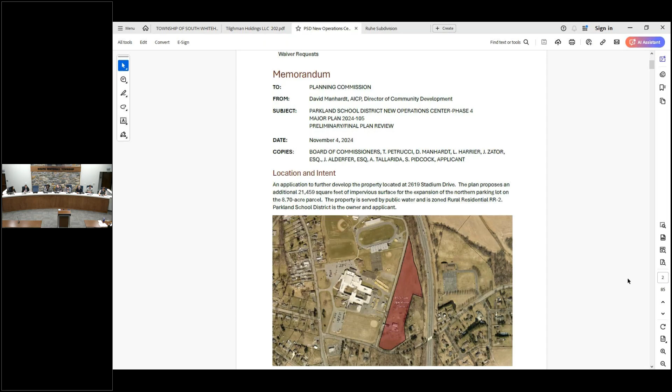All right, we're on agenda item number 4, subdivision review. We have 3 projects for review tonight. The first one is Parkland School District, New Operations Center, Phase 4. Before we get into that project, the company I work for does some work for the school district, so I'll be recusing myself from any votes. All right, we can start with the township staff presentation.

This is an application to further develop the property located at 2619 Stadium Drive. The plan proposes an additional 21,459 square feet of impervious surface for the expansion of the northern parking lot on the 8.7 acre parcel. The property is served by public water and is zoned rural residential 2. Parkland School District is the owner and applicant.

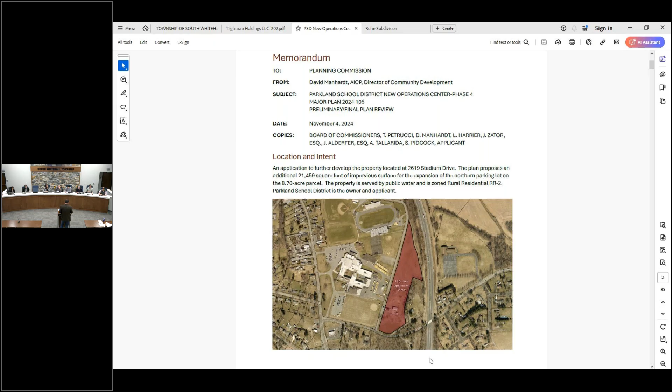We've seen various versions of this. This is the 4th phase, so they're looking to do some parking lot improvements. We are recommending approval based on conditions.

The conditions: prior to plan recording, the applicant should execute subdivision improvement, security maintenance, and indemnification agreements. Prior to plan recording, the applicant shall address to the satisfaction of the township engineer, the township water and sewer engineer, the geotechnical consultant, the public works department, public safety commission, landscapes and shade tree, parks and recreation board, community development department, and township zoning officer.

Then we're on conditions 11 and 12, which carried over from the previous phases. These conditions have the school district monitor the intersection at Limekiln and 309. There was some concern about the timing of these improvements in relation to the betterment project, so we're going to keep an eye on it as a team, and if anything comes up, we'll have it addressed.

The applicant addresses all issues and obtains all approvals deemed necessary by the Board of Commissioners, shall execute a declaration of covenants and easement for maintenance of stormwater management facilities, and shall reconcile all open invoices for engineering and legal services prior to plan recording.

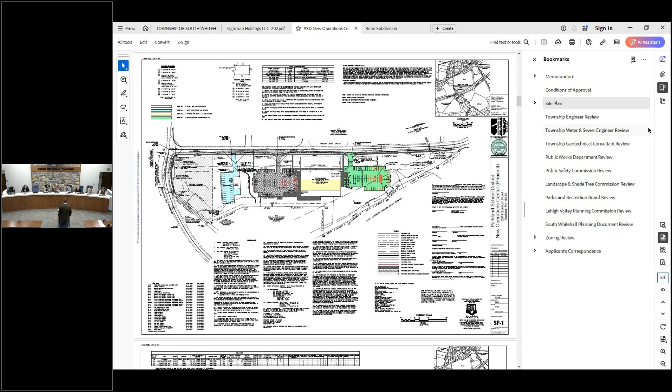All right, I'll read through them. Number 2 is section 312-12B20, requiring location, character, and elevation of any building within 100 feet of the tract. Given the minor nature of the development, a waiver of this requirement is requested to use aerial photographic information instead. Those in favor of the waiver? Make a motion. I'll second the motion. Those in favor? Aye. I'll abstain. Any opposed? None opposed. So moved.

Waiver request number 3, section 312, 12B, 15, and 21, requiring location of contours and sidewalks, trails, driveways, streets, easements, etc. within 400 feet of the tract. Given the minor nature of the development, a waiver of this requirement is requested. Does anyone want to make a motion? So moved. Second. Those in favor? Aye. I'll abstain. Those opposed? None opposed. So moved.

Waiver request number 4, section 312.13F3 and 312.43, requiring plans to be recorded prior to the issuance of a building permit. Given the minor nature of the development with site improvements previously approved, a waiver of this requirement is requested to allow the issuance of building permits. Do we have a motion? I'll make a motion to approve. Second. Those in favor? Aye. I'll abstain. Any opposed? None opposed. So moved.

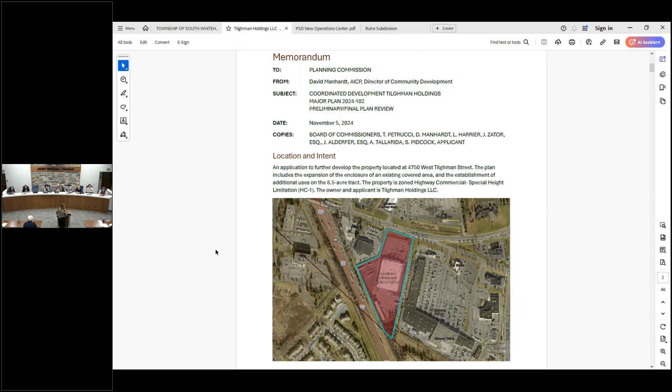Just to give a little bit of background, the project was subject of a waiver from land development, so the Planning Commission did not see that, and that was for GoPuff to go into the space that is now the Advanced Auto. So this application is really to formalize what's out on the site, and then include the area to the rear of where the Advanced Auto is going.

That's really the intent of this application, because they have additional plans for that. So this is really the starting point. At this point, we're not making a recommendation to approve. There's some cleanup that we have for the plans, but they are asking for clarification on some waivers, and particularly the discussion about the frontage improvements. With that, I can hand it over to Erin.

As mentioned in our November 7th memo to the township, a preliminary final plan review was performed by our office. The plan was initially submitted in July 2024, and we have provided comments to the applicant through each iteration. Some comments to note from our memo include Tilghman Street frontage improvements, such as curb and sidewalk, clarification of parking facilities, and coordination with PennDOT for the traffic analysis and existing permitted driveway.

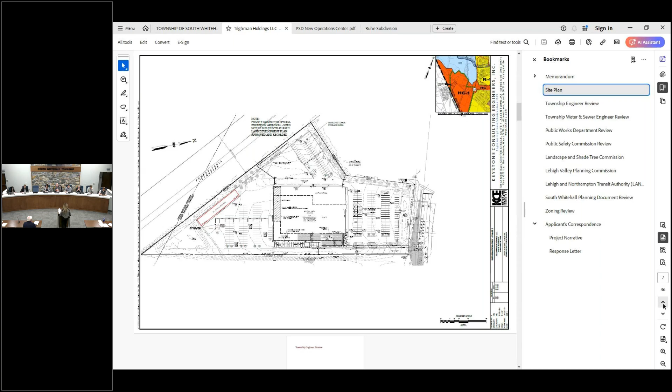As was stated, there was a previous land development plan for this site that was recorded back in 1983. Following that, there was a coordinated development plan, site plan, approved in 2022, but that plan was never recorded. So what you have in front of you today really represents what we're calling the Phase 1 Preliminary Final Land Development Plan.

But there's a lot going on with this plan. There's some cleaning up of past permitting discrepancies. There's also documentation of some uses that weren't really documented before, although various forms of permitting did occur. And in addition, we are doing the expansion of what was the GoPuff space, but will now be occupied by Advanced Auto.

There's also an additional future tenant space provided for on this plan. The configuration between what was GoPuff and is now Advanced Auto, and what was shown as future space and is now future space, has changed slightly. There's also an addition of an ATM facility in the front area of the parking.

So what you have before you is a work in progress, to really get all of those elements straightened out and in compliance with the ordinance. We did receive last Friday a pretty comprehensive packet of review letters from the engineer and Public Works, and we're getting through all of that.

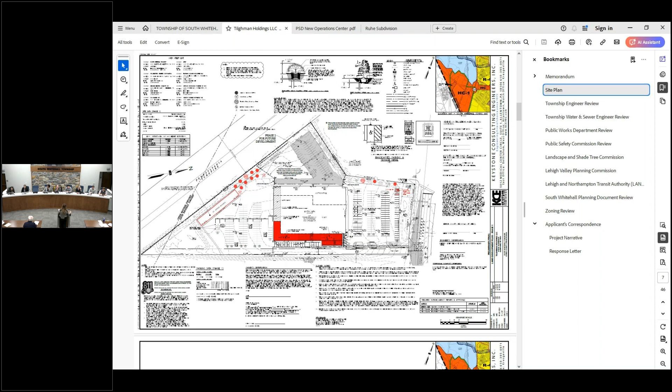So we're looking for the sense of the Planning Commission as it relates to those types of waiver requests to be able to move forward, and then we'll finalize that in the submission for another meeting to say specifically what they are. But there's issues with respect to E&S controls, storm drainage, contour lines. Nothing is being done in that regard.

That enclosure area is already impervious. It was impervious, with the exception of a very small bump out on the corner. The footprint of the building is identical, and that bump out was actually put on previous pavement, so that was also impervious. So we have no storm drainage issues, would not require contours, wouldn't require E&S controls, and so forth.

So we're just looking for kind of a thumbs up, thumbs down that the Planning Commission would be receptive to making those kinds of recommendations, and then we'll finalize that in the next submission.

We see the waivers. I read some of the engineering review, and of course it would make sense had this been a brand new project, but I don't see the need to rip up an entire parking lot to put curbing in or put new lighting in.

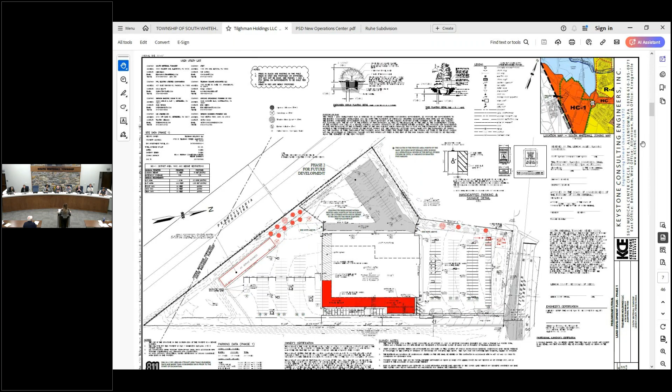Honestly, I can't imagine why you would do anything other than what you've done to this point, separate from the frontage requirements, which is a separate conversation. But why you'd add additional stormwater mitigation or lighting.

I've seen the work being done there, so I don't see why you would do anything more than what you've just done. And David, to your question, I can quickly mention what the waivers are in the engineer's letter, just briefly so you know what they are.

Yeah, because it does list the SALDO sections. If you could indicate what that section is, and maybe Aaron just confirm. Do you have that? Yeah, I have it in front of me. Okay, so the first one is SALDO 312-12A6 and 312-12A7, which requires certification for water and sewer.

We have a planning module approval letter for this project from the 1980s. We have provided a projection of sewer and water use, the original approval for the planning module, which also implies that the township approved the use of the facilities for the project, for the building. And we are less than that 1,000 gallons that was approved. We're at about 650. So we are below the amount of water that was approved back in the 80s by the township as well as DEP.

Submission of plans to PennDOT, that's in the list. We will make a submission to PennDOT. We'll fine tune this later on, but we will make the submission. The whole purpose of that submission is to hopefully receive confirmation that a PennDOT permit for a low volume driveway that was issued back in the 1980s is still valid. And we've generated some traffic counts to justify that, but we will hopefully satisfy PennDOT that it's acceptable since it connects to a state highway.

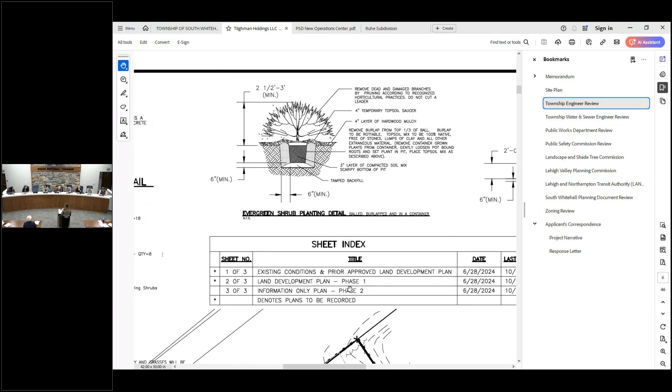As you said, there's some lighting in the parking lot in the front, and there are several light standards in the parking lot in the rear. As part of this expansion along the side of the building, there are light packs on the building to illuminate that new area. So that would be illuminated by virtue of light packs on the physical building. Just to confirm, the parking spaces to the very rear, there are lights in the parking area? Yes, there are several standards there, maybe 3 or 4 in the front and 2 in the back.

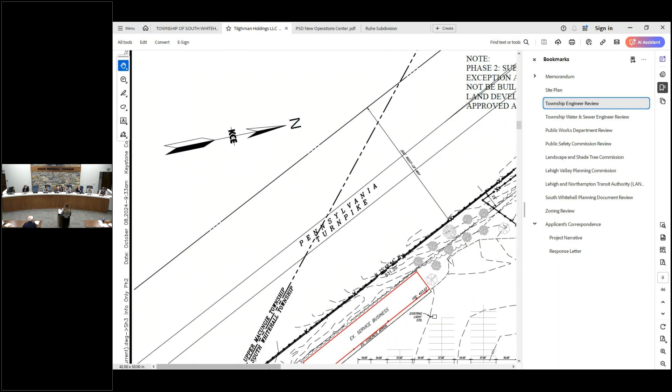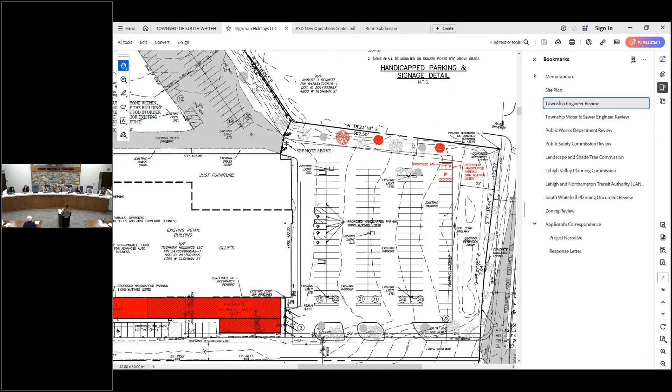It does look like it says proposed wall pack. So that's essentially, instead of a light pole, a light mounted on the building wall at an elevated height. I couldn't tell you exactly, but I'm thinking there's maybe as many as half a dozen, because as I recall driving by, they're along the length of that building to illuminate that whole side and around the back.

So there actually is lighting proposed for that. There is lighting proposed, but I have little doubt that if you apply the current standards in terms of lumens within the parking lot, these standards may not adequately illuminate the parking lot. That's the primary concern, and that's what we're trying to avoid. In terms of the building, those wall packs will illuminate the part of the building where people will be going to the various facilities. So we would modify it to indicate that wall packs are on the building. We're asking for relief with respect to providing any additional lighting within the parking lot.

This is about low impact development concerning what's existing already. All they did was basically enclose an overhang. It was already partially enclosed. There was a little bump out to it as opposed to what was just part of the roof line. The little section in red that's blocked out and bumps out, that was new. That small rectangle on the right side, where you can see the line through the middle, represents an area that's outside, not underneath the previous roof.

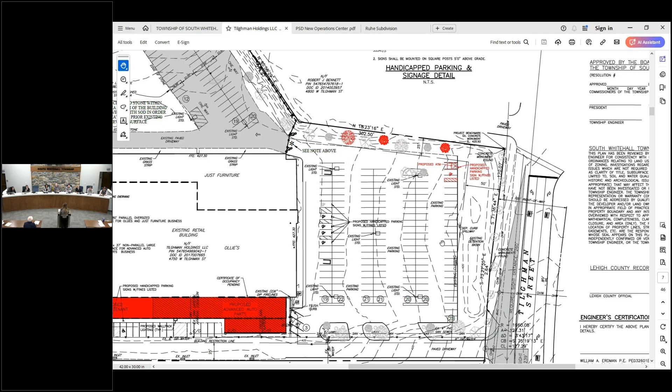That's why it's only going to go so far, because the turnpike is only doing what they have to do in coordination with PennDOT. Thank you, we'll look forward to working with the township. Thank you for your feedback, we'll be back in front of you before long, hopefully.

All right, we're on agenda item number 4C, Robert Ruhe subdivision. Mr. Manhardt, would you like to do the staff presentation? Yes - this is an application to subdivide the property located at 2442 Huckleberry Road.

The plan proposes to subdivide the 4.596 acre parcel into Lot 1, containing the existing two-story dwelling, barn and outbuilding on essentially 1 acre; Lot 2 containing 1.07 acres; Lot 3 containing essentially 1 acre; and Lot 4 also containing an acre. All lots are proposed to be served by public water and private septic. The property is zoned R4 medium density residential.

Robert H. Ruhe is the owner and applicant. So we've reviewed this plan - it was originally submitted in 2013. We are recommending approval based on the following conditions. Was everybody okay with the summary of conditions I gave last time? Okay, that's fine, unless you see something controversial. Yeah, that's right, I'll read the controversial ones.

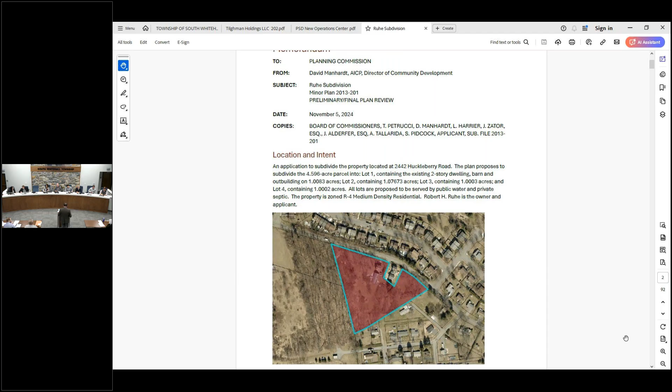Prior to plan recording, the applicant shall execute subdivision improvement, security and maintenance, and indemnification agreements. The applicant shall address comments from the township engineer, township water and sewer engineer, township geotech consultant, public works department, public safety commission, parks and recreation board, landscape and shade tree commission, and Community Development Department. The applicant shall obtain a letter from Lehigh County Conservation District approving the soil erosion and sedimentation control plan, and obtain a letter from the Pennsylvania Department of Environmental Protection or LCCD approving the NPDES permit.

That the plan be amended to include a note referencing the state highway law. Condition 13 is that the applicant contributes fee in lieu of parkland dedication. Condition 14, the applicant shall pay water and allocation fees prior to plan recording, and payment of water tapping fees shall be tendered prior to building permit issuance.

Condition 15, that the applicant shall execute a declaration of covenants and easement for maintenance of stormwater management facilities, for the right but not the obligation for maintenance of the on-site stormwater management facilities. That the applicant shall dedicate to the township additional right-of-way along the two frontages of Huckleberry Road at a width acceptable to the township, with dedication to occur prior to the plan being recorded.

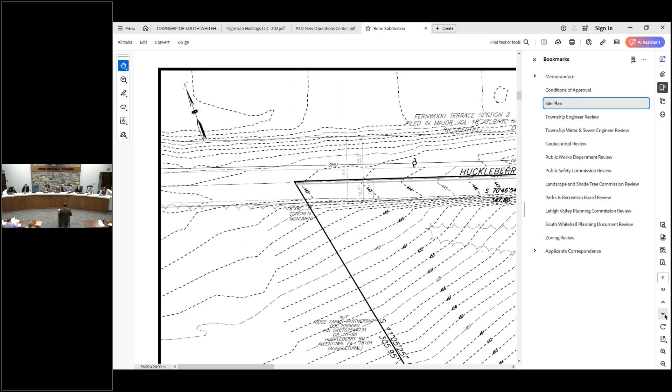As listed in the packet, the applicant has specifically listed the waiver and deferral requests for the private street and Huckleberry Road. Through the various plan iterations, we feel that this plan represents the preferred layout from past discussions between township staff, the applicant, and the engineer.

We have no objection to the waivers requested for the private road. For Huckleberry Road, we recommend deferrals rather than waivers for cartway widening along lots 1 through 4. There is a small sliver of widening required to meet the half-width standard of 20 feet along lot 2. Along lots 3 and 4, the plan shows a deferred proposed curb and sidewalk placed at the location where widening were to occur. We have no engineering objections to the remainder of the waivers and deferrals for Huckleberry Road.

At this time, conditioned upon addressing the remaining comments contained in our memo, we can recommend engineering approval.

Thank you. All right, would the applicant like to do your presentation?

If I may, just a few words. Most of this is engineering, and a wise person knows their limits. My name is John Swartz. I'm an attorney from Prokop and Swartz in Fogelsville, helping the applicant this evening. And very well summarized, a lot of history on this plan.

Mr. Manhardt remembers, Mr. Adams back there remembers. I think he's here just because he couldn't believe it's here already. I'm sure you have a better reason than that for being here. Oh, good. Okay, fine. Wow.

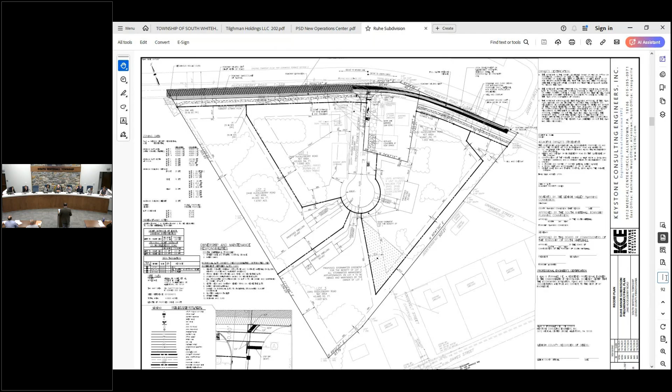Okay, so these waivers and deferrals, I know there's a number of them. Just again, the nuances of this property have made it difficult to conform to everything. So I kind of have it split up between two different categories. The first category relates to the driveway that comes into and serves the properties.

So the first one is curbs that are required on all public and private streets, which is section 11-32B1. Basically, this has to do with looking at - I guess the plan isn't up - but it's not proposed to have a curb along the paved area.

Number two, sidewalks should be installed along all these subdivisions, which again goes hand in hand with the curb I just mentioned. This is section 11-32C1A. Again, it's low volume. People could clearly walk on the driveway instead of a dedicated sidewalk.

Number three, the cul-de-sac for this facility would have a right-of-way associated with it, with a 52-foot radius and a curb radius of 40 feet. So a waiver is being requested for that lesser dimension. What we have shown demonstrates that it will allow a fire truck to turn around.

Number four is the width of this driveway. A waiver from this requirement is requested as dimensional constraints from the existing residential structures prohibit the full width required of 36 feet. So a 20-foot cartway is proposed as the shared driveway.

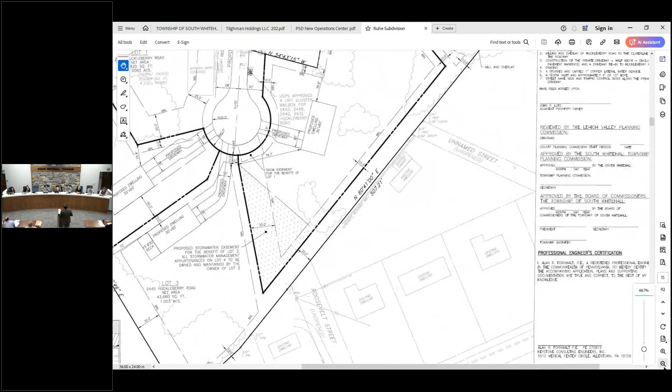There was also a lot of discussion over that. If you want, come up to the microphone. I was just going to interject that there was a lot of discussion about this, even for extension of utilities, and enough time has gone by that I believe the township's stance was that there really isn't any current rights that the township would have or would access, or would wish to access to have anything public in nature go across there. So the attorneys could qualify or discuss what would happen with that. But I think probably there's a good chance that half of each of those could be claimed by either of the neighbors, most likely. We would not have any claim to those roads, but we did explore the roads as a possible way of running those water lines in a more efficient fashion, but we could not find any rights that we would have at all to those roads. So there they sit.

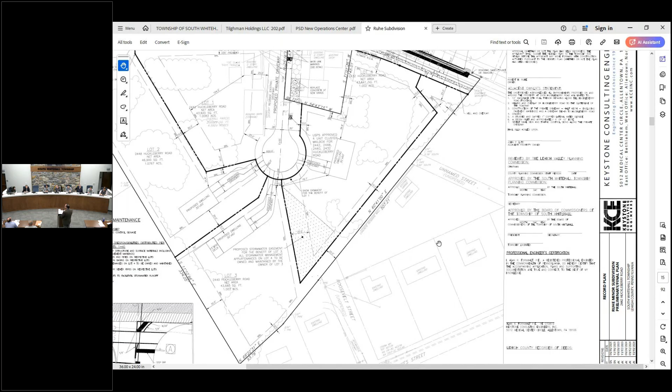How are you dealing with your stormwater infiltration rates? I saw they were pretty high, above what DEP normally expects. We had our geotech engineer look at it, and we're going to use an engineered sand to try and slow the rates down. We had numerous discussions with the Conservation District, and we agreed on a design rate of 2.5 inches per hour, kind of the worst case scenario, because we got rates anywhere from 15 to 20 inches an hour. Yeah, I saw some 30s on there. So DEP's on board with it.

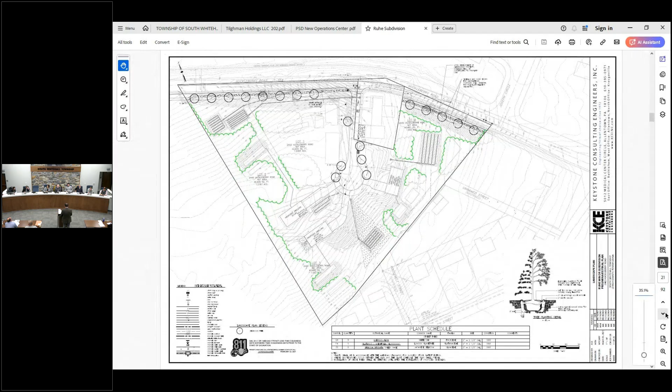We're through admin complete, going through our first round of technical review for the NPDES permit, and they've already looked at it. Kim Ziegler has looked at it extensively, she does their infiltration review. If Kim's happy, I think we can be happy. So yeah, we're going to try and slow the rates down. These were designed so the underground facilities do not have any surface runoff, even in the 100-year storm. They have an emergency overflow in case something would happen, but we're able to take a lot of the surface water, put it into the ground, and hopefully not create any problems along Huckleberry Road. Got it, thanks.

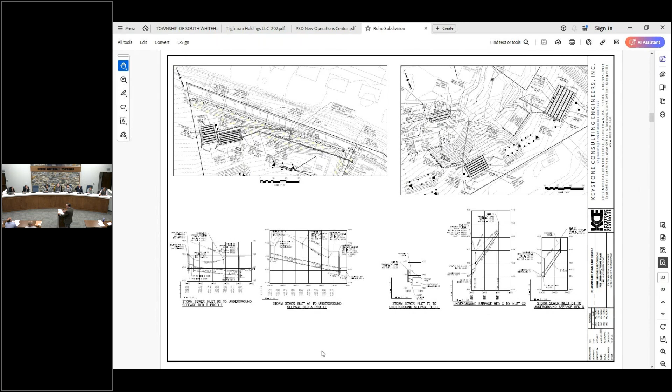Hi, my name's Leslie Thompson-Strack. I'm at 2417 Euclid Street.

I'm sorry for my outburst earlier, I should not have done that without the microphone. But yeah, I'm actually the house, right? You can kind of see it with the unnamed street.

That's Euclid, that's my driveway where it kind of meets that little narrow part of lot 4 or lot 3. But I just want to confirm they're not actually going to do anything with that - it's just going to be grass there, they're not tying into our property or anything. That's how I understood it.

The other thing I also wanted to confirm - I know they're having that rain garden kind of in lot 4 to the northeast of our property, and I assume that's where most of the stormwater runoff's going to go. We wouldn't expect anything to come into our property at all, because my house is pretty close to where the construction's going.

Can we flip to a plan that shows the underground seepage bed? Yeah, I can tell you there's a lot of people that are reviewing their plans to make sure that their water does not get to your property.

I figured it was, I just wanted to double check again just to make sure, because it seemed like it was going more up the other way, but what about coming down to the corner where my house is - is it going to all be directed that way? There wouldn't be anything coming straight down, you're slightly upslope from them. We designed it - we are mitigating the stormwater to more than what the requirements are for the release rates.